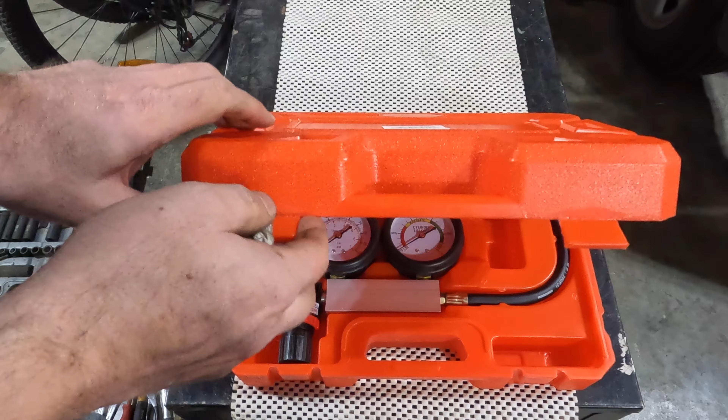Alright guys, here she is. She's not a thing of beauty, I'll tell you that. The clasps feel a little cheap, like they're going to last 4 or 5 times, but for most people, maybe that's all you're going to use this thing for, to tell you if your engine's good or bad. I don't know. Yeah, just a bizarre part number from Amazon. Chinese made. And here we go.

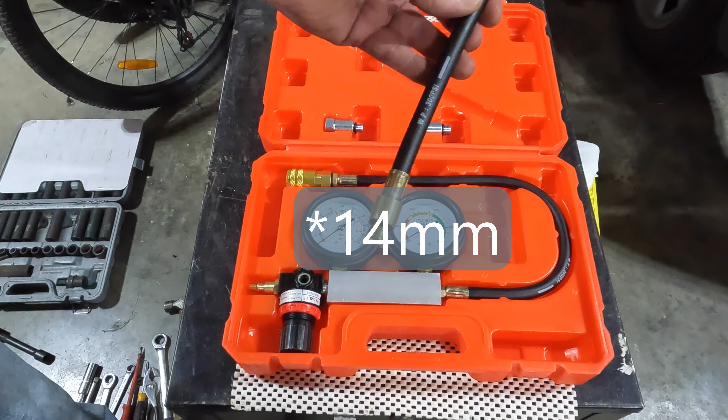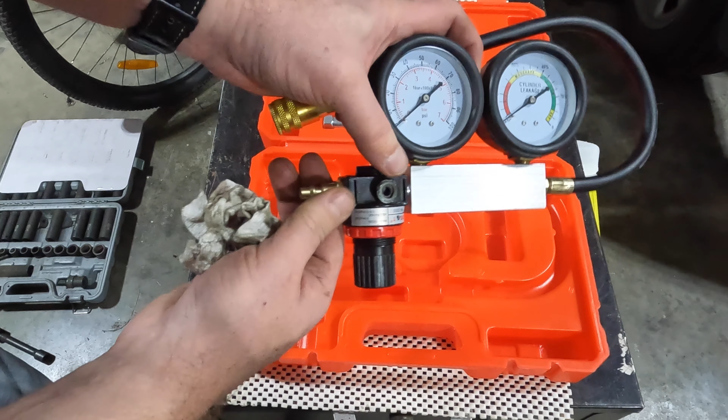So inside the box, we've got this tube that goes inside the cylinder. On this end you've got a quick disconnect. On this end you've got a 14mm connection. It comes with adapters for 10mm and also 12, so it should cover most of them. And then we've got the main unit. This end here is what connects to that line once you're testing. And then the inlet from your shop air goes here. There's a regulator here and 2 gauges.

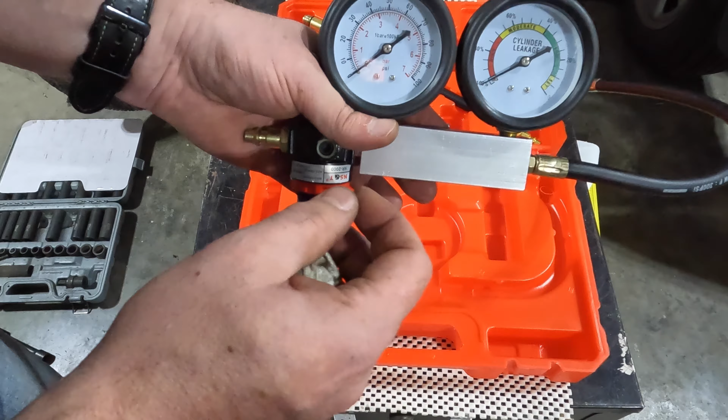So the instructions say don't screw this into the cylinder, don't connect it to the outlet here yet. Connect this to your shop air, maximum 100 psi, it'll work from 40 to 100. And then you adjust this regulator until this gauge reaches 0 loss, which is the set position down here. Usually I found it's about 28 psi to 30 psi here on the incoming. This regulator is trying to balance incoming air with a little orifice in here and a slight bit of leakage out the end of the line. And when you have a balance, 0.

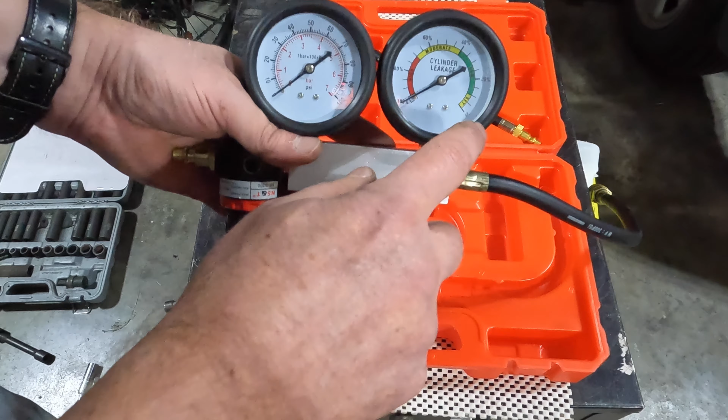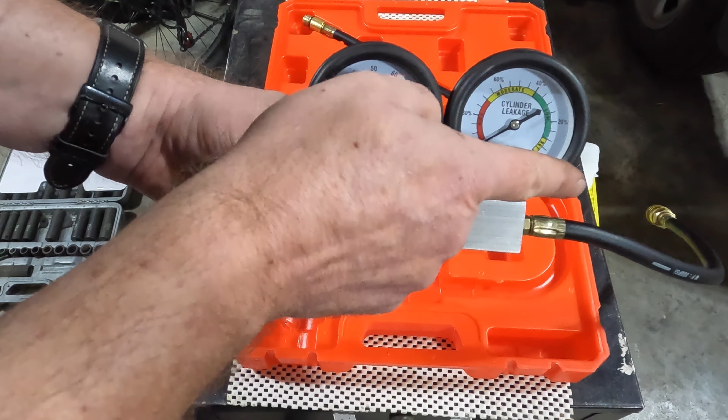Once you connect this up, this will go into your cylinder, and if there's a leak in your cylinder, that's now a path for the air to go, and this will read leakage on this gauge. So in a perfect engine, you'd be down at 0. Most engines always have some leakage, just the way the rings and the pistons work, and the valves never seat quite airtight, especially not under more pressure than 30 psi. So this will normally read in the green, telling you you're good, moderate, not good, high, terrible.

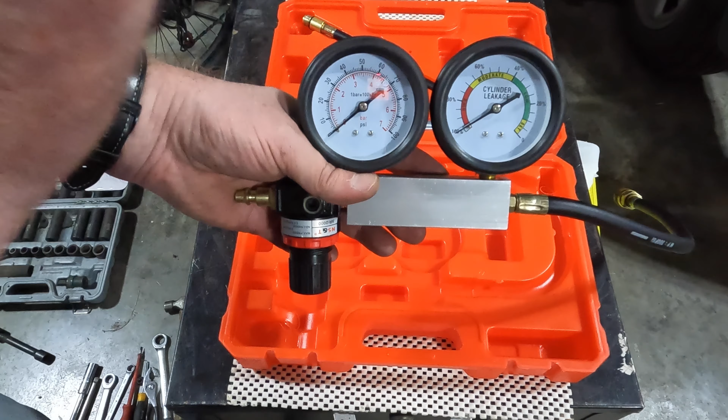So with this, obviously, you're checking for leakage in the valves and the cylinders. So you're going to want to make sure the cylinder and valves are in a position where both valves are closed for the cylinder you're testing. So top dead center normally. Because otherwise, if one of them's open, you're just going to read the valve being open, which would be a leak.

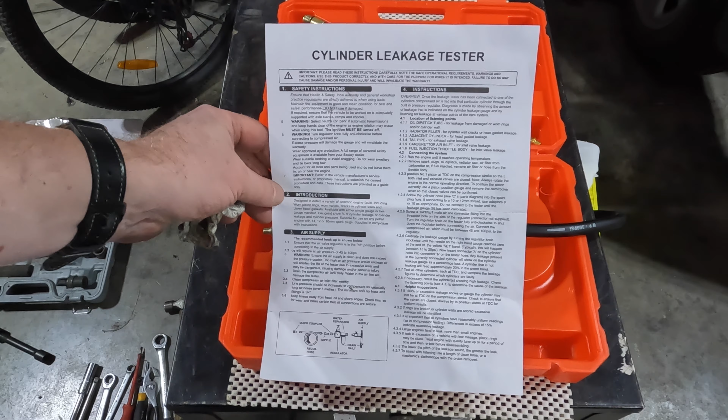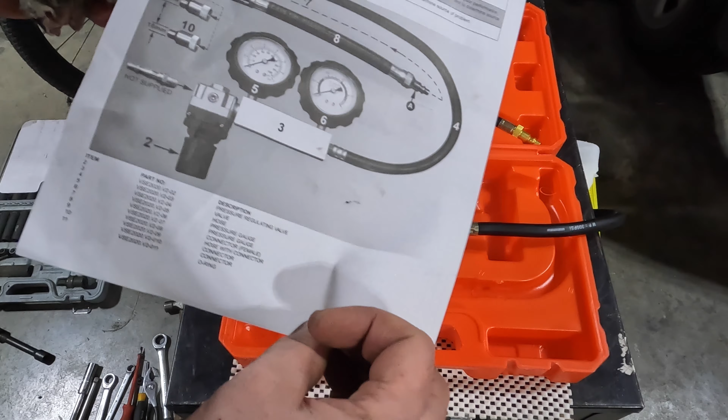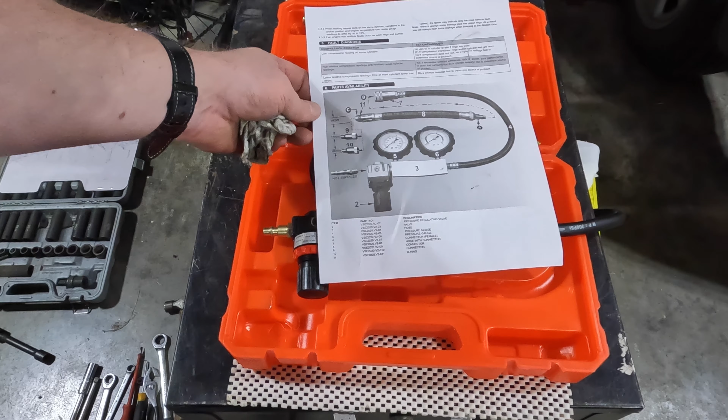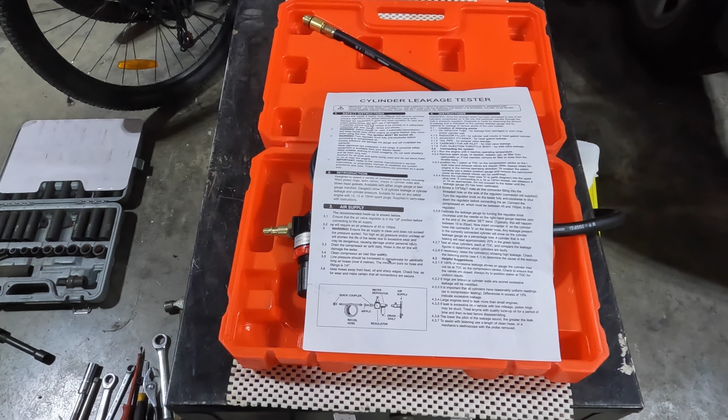The instructions, I gotta say, are actually pretty decent. There's a good instruction sheet that came with it telling you how it's supposed to work, how to set it up. Also a suggested shop air setup with a dryer. And a complete parts diagram on the back. So yeah, under ease of use, that's a definite bonus point for this rig, because normally you get nothing, or you get basically rice paper with tiny instructions that tell you to go to a website, or cross fingers, good luck, have at it. But yeah, I was quite impressed with the instructions with this, so that's great too.

But the only negative is the case, really, at this point. But I mean, really, what do you need? You don't need a leather case for something you're going to use 4 times in your lifetime, probably. So yeah, that concludes our unboxing. So next we'll run it through its paces, and lastly we'll do a score. See you at the engine, guys.

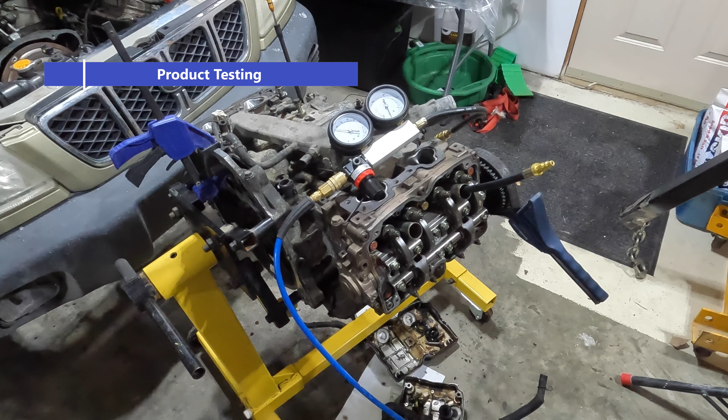All right, so I've got the leak down tester connected to the number 1 cylinder on this Subaru Boxer engine here. And normally you're probably going to do this in a car, but this one's out of the car already. The timing belt's all off.

And the way to do this is when the intake and exhaust valves are both closed. So see how I've got play on both of them right now? That means there's no loading on the valves. The springs are free to do their thing. They're expanded all the way, meaning the valves should all be seated on this cylinder.

Another way I can check that is by rotating the cam. See, at this angle, the exhausts are trying to start opening. If I go back a little bit, you can see the intakes on this cylinder starting to open. So right now, there's no tension on this sprocket at all. So both these cylinders are actually in a position where all the valves are closed. So that's the point at which I'm going to test. I've already got the 14 millimeter threaded connection screwed into the cylinder here.

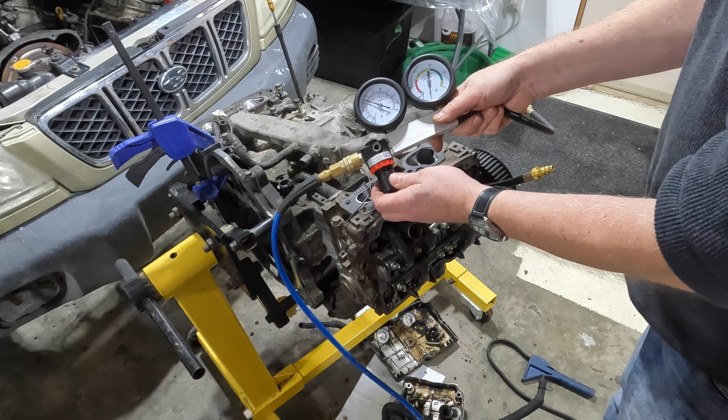And the instructions on this unit say to fire up the air compressor, maximum 100 psi. With this disconnected, meaning it's blocked off, there's a quick disconnect in here. It's blocked right now. So now what we're trying to do is balance the 2 gauges. So there's a regulator they give you on here. And what I'm finding is it's really hard to get this to balance. Before I tried twice and it either overshot or undershot.

So there you go. You get it balanced like this at the 0 on the gauges. Like so, and then it says to hook up the tester. So I'll plug it in. Why is it terrible? Let's try again. About there. See, a pretty bad number there. We're in moderate.

Okay, we're back in number one over here. Got it set. Definitely loose on both. It's still set to 0 here. Well, interesting. That's the exhaust valves I'm cracking here. Yeah, it's still balanced. I'm wondering if it's just blowing some crap out from between the seat and the valve and just letting it seal a little better. Let's retest number 3 here.

There she is, loose on all 4. Gauges are still balanced. Oh, great numbers. There's the intakes. So if you had bad intake valves, or seats on them rather, it would look like this, right? And you can hear the air coming out. And as it seals, you get into the green.

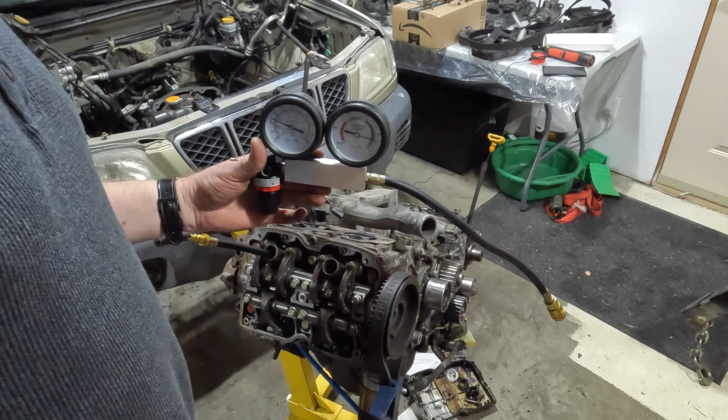But yeah, if you're properly prepared and you know what you're doing, 100 psi into the engine with 200 psi gauges seems to be sort of the old standard. So I don't know. I guess it is what it is. It is what you're comfortable with.

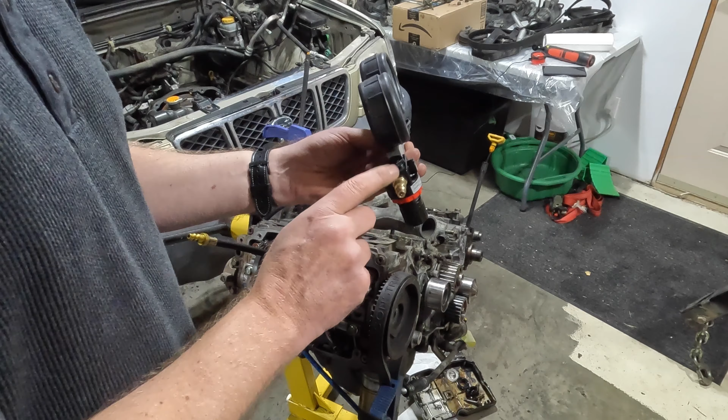As far as quality on this guy, when I first hooked it up, I had air leaking out of this thing from my quick disconnect, and it actually happened to be this fitting here. This fitting was loose. It was really loose. I had to put a 14 millimeter wrench on here and tighten it right down. That stopped that leak. So unfortunately, I can't say the quality's excellent when that happens. But other than that, it seems like a well-built piece of equipment.

The gauges are decent. They do seem to have glass on the dials, on the gauges, sorry. It's a 300 psi hose working pressure. At least it claims to be. That's the only thing stamped on it. No part number, no kind of certification. Just says 300 psi working pressure. So I don't know if we believe that or not, but if you do, then that's a good thing.

Yeah, as far as usability, quality, because of the leaky fitting and the sort of no-name hose and gauges on here, I don't know, maybe it worked, it did what it was supposed to. I think they probably all are finicky in their usage like that.

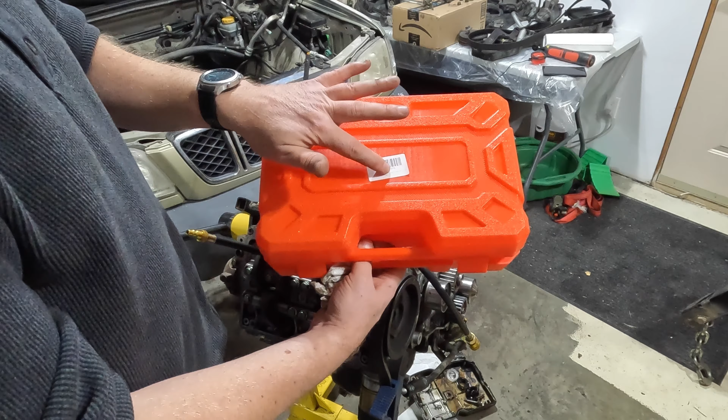The other part about the quality, I don't know. It's an inexpensive gauge set, right? But there's no label telling you on the outside what it is except this mini made in China sticker. I'll probably put a label on it so I know what's in here. But the case is just super cheap feeling. But I mean, it's a shop tool. I'm glad it has a case, I guess. I shouldn't complain too much. I don't think this case is going to last very long.

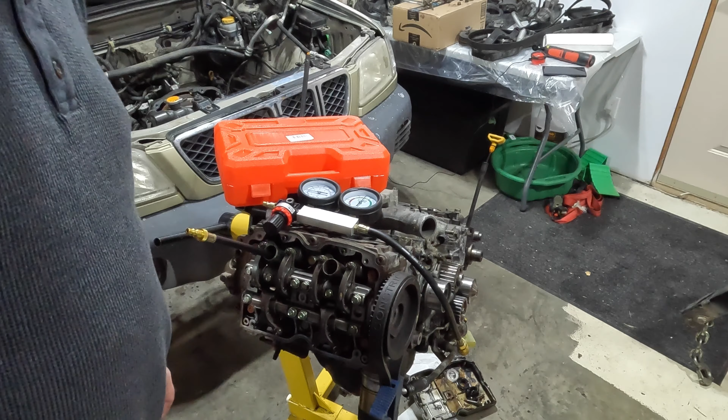It does come with 10 and 12 millimeter adapters as well as the 14 on the hose, so that's a good thing. I'm happy to see that. In terms of value, this thing was like 50 bucks. So for a good shop tool like this, that can diagnose your engine for you, and that seems to be half decent quality, with a case, albeit cheap, and the other adapters, the value is definitely there. It did what it was supposed to do, so yeah. I'm not going to bother doing the math right now. I'll let you guys see the scores at the end. Overall, thumbs up. It's time to tally up our scores.

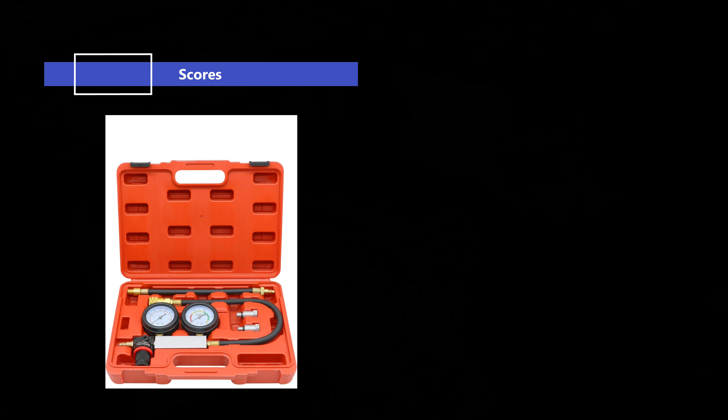So for this leak down compression tester, we're going to assign a quality rating of 4 out of a possible 5 wrenches. We felt the quality was good enough for what it is. For usability, this is where that setup with the regulator took it down a couple notches to a 3 out of 5. For performance, we're going to assign a rating of 4 out of 5. The tool did what it was supposed to do once you had it set right. And for the last category, in terms of value, this tool seems to provide excellent value for the buck. It was under $50, so that's great.